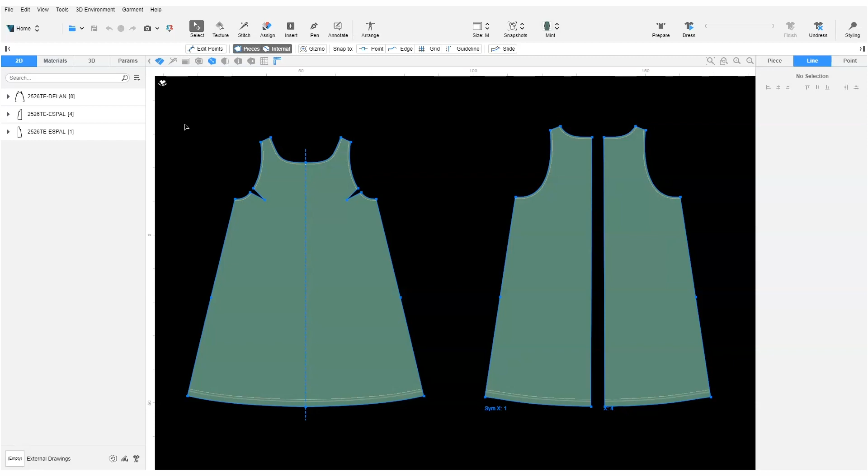To begin, we load the sizes in the grading pane using the keyboard shortcut Alt-G. First, we add the different sizes. We click Add Size and Biggest twice to give us the 2 larger sizes. We click Add Size and Smallest twice to give us the 2 smaller sizes. Then we rename the sizes by double-clicking each one and typing in the correct label.

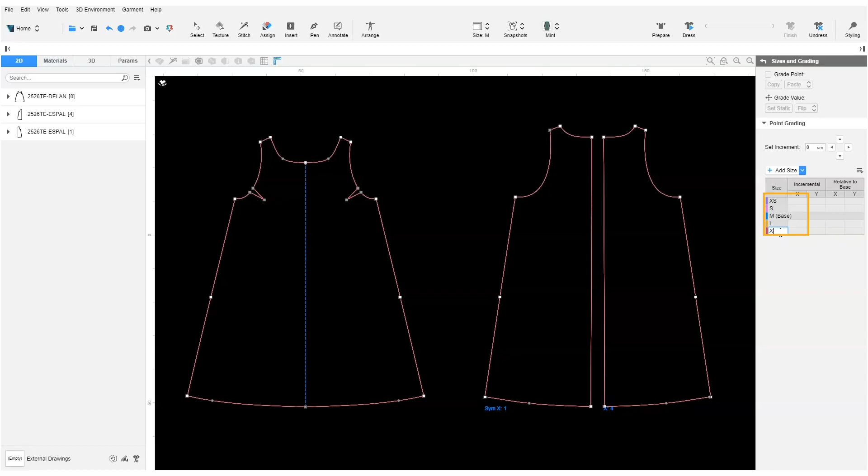Great! Let's get started with grading. To grade a garment, we use the grade points on the base size. The outline of the pattern pieces for the other sizes is plotted by reference to those base size grade points. Grade points on the base size are colored white.

When grading, we need to select a grade point. Note that by default, all corner points of the base size are grade points. However, as mentioned in a previous lesson, we can configure any point on the base size to be a grade point by selecting it and then selecting Grade Point in the Sizes and Grading pane.

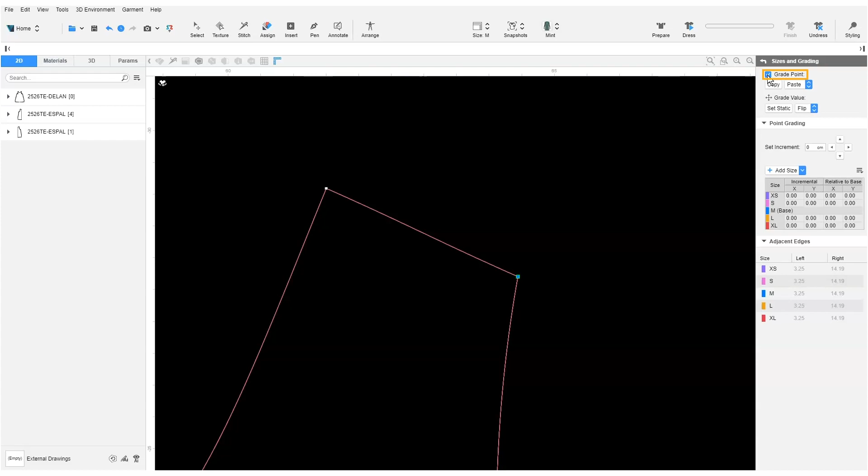There are 2 ways to grade in VStitcher: visually and manually. Let's look at the visual grading first. Visual grading is grading using your mouse. In the 2D window, we drag each grade point to where we want it to be. We are simply eyeballing the grading. As we grade, we can see the results in the table in the Sizes and Grading pane.

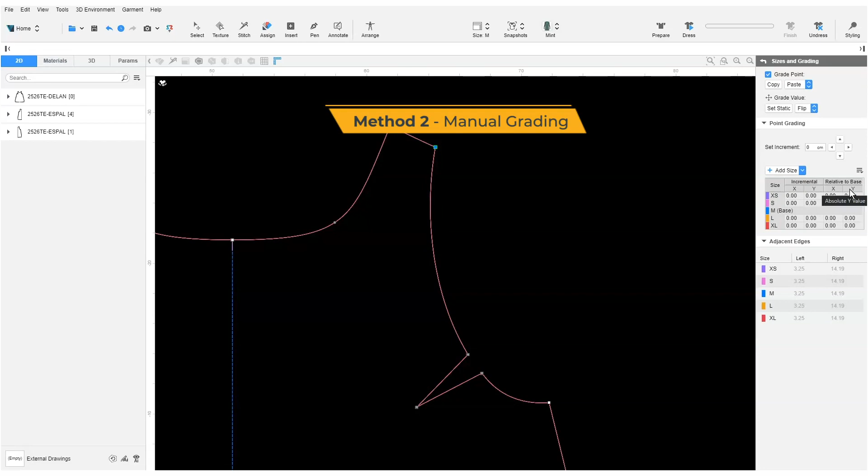If we want to set standard increments for each grade point, we can use the manual method of grading. We do this much in the same way as we would grade patterns in a 2D CAD system. We can make changes to the position of each grade point on the X and Y axis and make such changes incrementally from the base size grading point, or relative to the base size grading point.

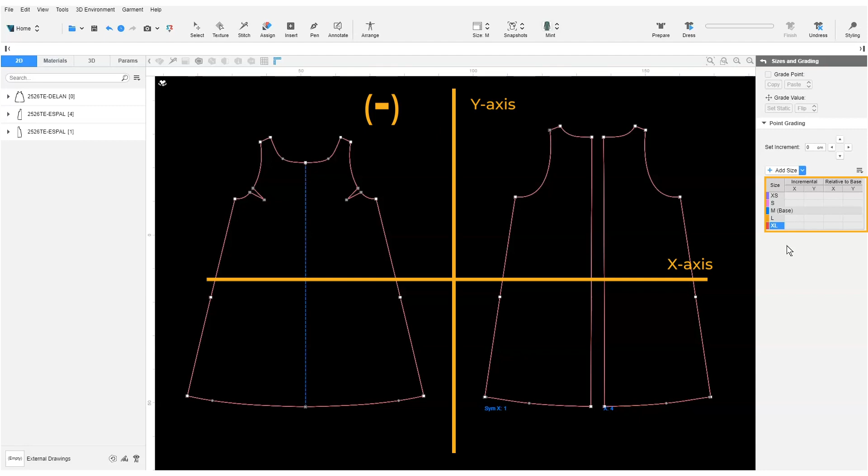Just one thing to take note of: in VStitcher, the use of y-axis positive and negative values matches the approach of typical 3D software, but this is different from pattern CAD systems that use the traditional method. In other words, to move a point up the screen, we use a negative number on the y-axis, and moving a point down the screen, we use a positive number.

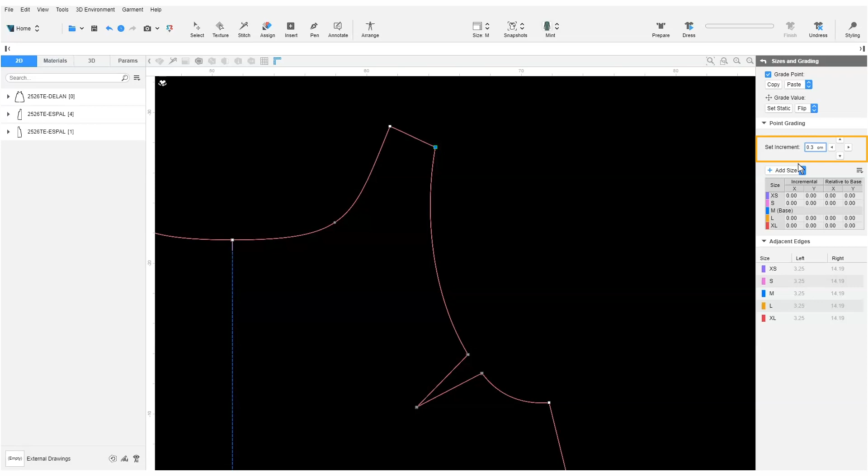To make changes incrementally, we can use these arrows or fill in the increments in the incremental columns on the rule table. For instance, the shoulder point needs an increment of 0.3 on the X and Y axis. We input 0.3 to set the increment value and use the arrows to determine the direction. We will move 0.3 up and 0.3 to the right. The rule table is updated with the grade rules we have added.

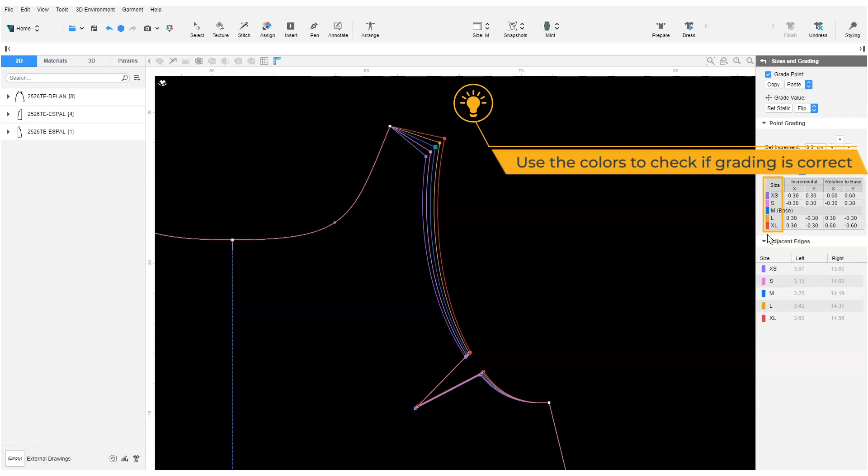In the 2D window, the grading is displayed with each color indicating a size. These colors are the same as the colors indicated in the rule table, so we can check if the grading is correct. On the Sizes and Grading pane, below the rule table, the measurement of the adjacent edges to the point is displayed. When we hover our cursor over a value, the edge is highlighted in the 2D window for easy reference. This gives us an extra way of checking that the grading is correct.

Note that the Adjacent Edges section is only available in version 2021.1 and newer.

When using the arrows to set increments, we can see all the sizes have the same incremental value. If we need to set different incremental values on only a specific size, we can input the value into the rule table manually. For example, for extra small and extra large, we want to set an increment of 0.4 instead of 0.3 for both the X and Y axis. We can double-click on the values in the table and edit them accordingly.

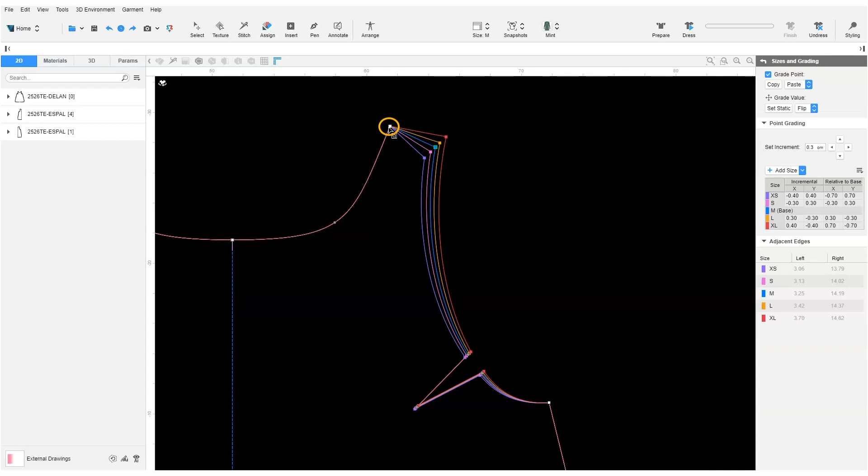Let's move on to the other point on the shoulder edge. It follows the same grade rules as the other point of the shoulder, so we can simply copy the grade rules of this point and paste XY to copy the same incremental values on both the X and Y axis. Under the Paste option, we have options to paste the copied rules on the X-axis only, the Y-axis only, or both.

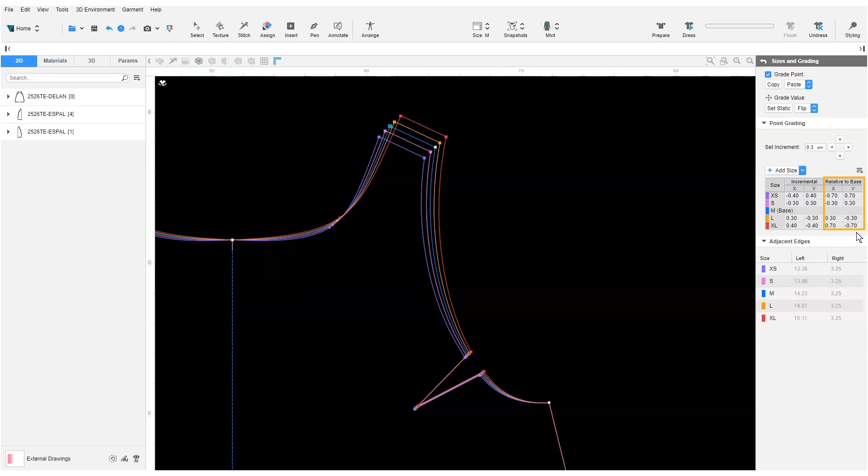Another method of grading is by adjusting the values that are relative to base size. A change relative to the base is the total change measured from that grading point to the base size grading point. Let's adjust the center front grade point. For size small and large, we want to adjust by 0.3 centimeters relative to base. For extra small and extra large, we want to adjust a total of 0.5 centimeters relative to base along the Y-axis. As seen in the table, we grade the sizes.

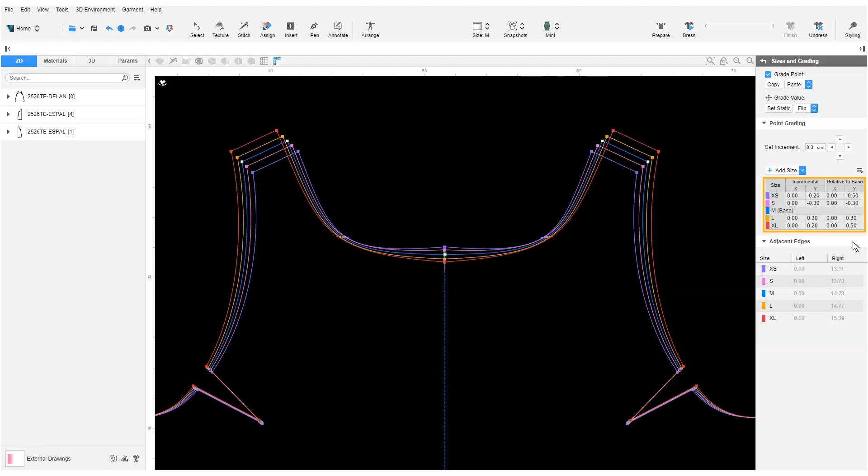The grading settings are dynamically linked, so if we make a change to an incremental value, relative to base is automatically updated, and the other way around.

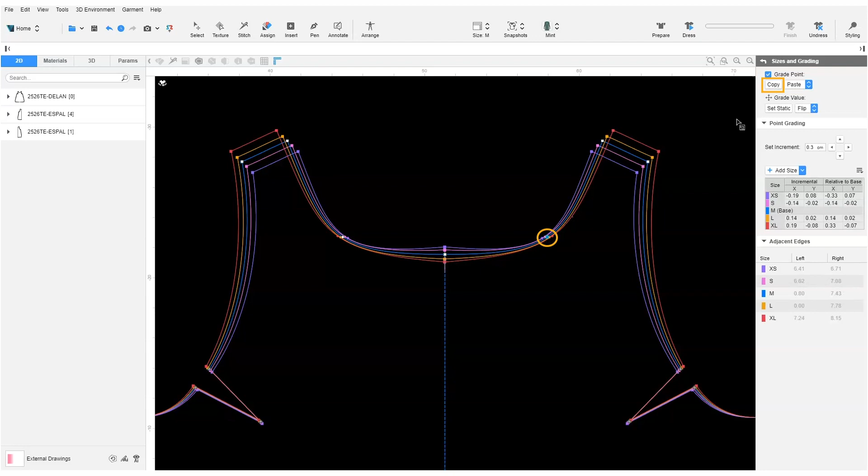The neckline is not even. To fix this, let's change the point along the neckline to a grade point. We copy the grading from the center front and paste Y on this new grade point. When grading, we can multi-select grade points that are using the same grade rules before adjusting the incrementals.

Let's adjust the Y values for the hem points to have a 2 cm increment. And now we have completed the grading for the front pattern.

We can repeat the same process for the back pattern. Alternatively, if they use the same grade rules as the points on the front bodice, we can use the copy and paste functions to quickly and easily grade the back pattern. We copy the grade rules from the shoulder point and paste XY on the back pattern.

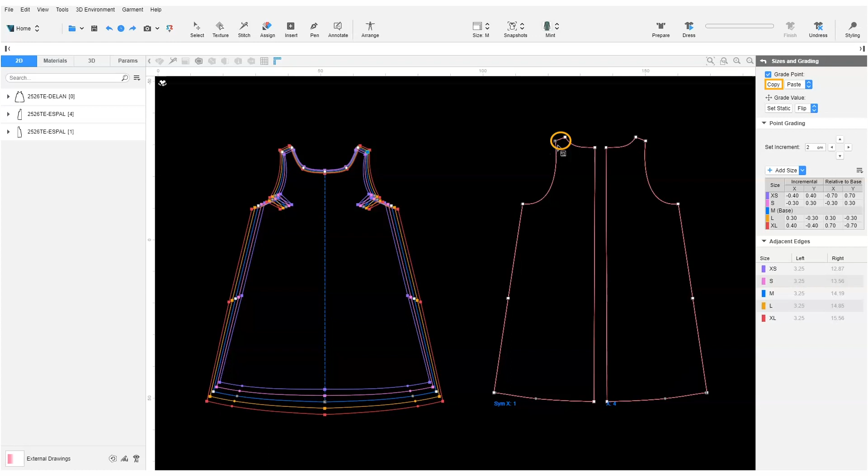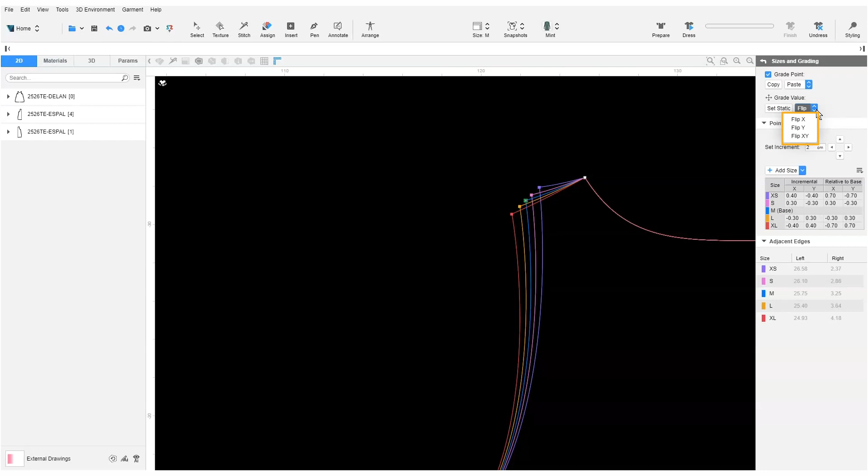Here we see that the grading is incorrect and it is flipped. Let's fix this. We flip the grading by selecting Flip XY. This flips the grading on both the X and Y axis. Similar to the paste function, Flip has options which allow us to flip grading only on the X-axis, only on the Y-axis, or both.

We continue copying and pasting the grade rules from the front pattern to the back pattern, but we paste on the back right pattern so we don't have to flip all the grading. We have completed the grading for this garment.

The last option is setting a static grade point. Setting a static grade point means that the point selected is the stacking point, or the 0 point. This is only if we want to set one particular point to be the stacking point. The default stacking point for every pattern is the center of the pattern, so if we want the grading to be stacked to the center of the piece, then there is no need to set any of the points to be static.

Just one thing to note, after a static point is set, it's not possible to change the static point back to be at the center of the pattern. We would need to undo that action. So if we want the grading to be set at the center of the piece, we know not to set any other points as static. Here's an example of what setting a static point does.

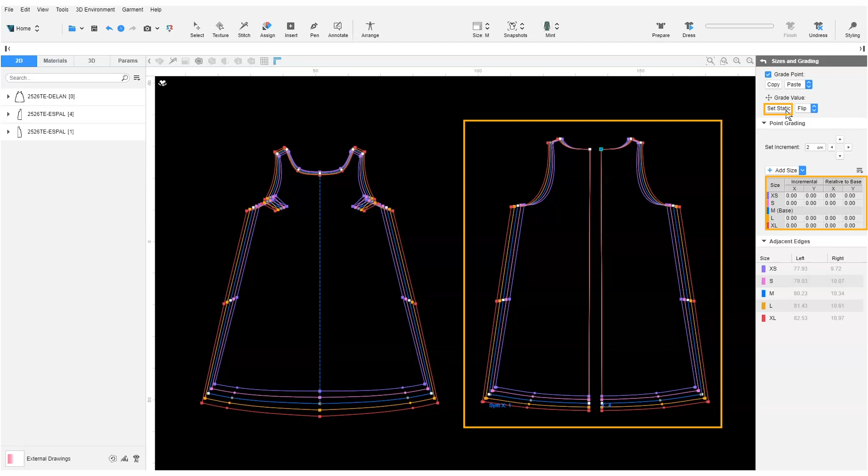And that concludes our look at how we grade a pattern from scratch in VStitcher. For more information, visit support.browzwear.com.